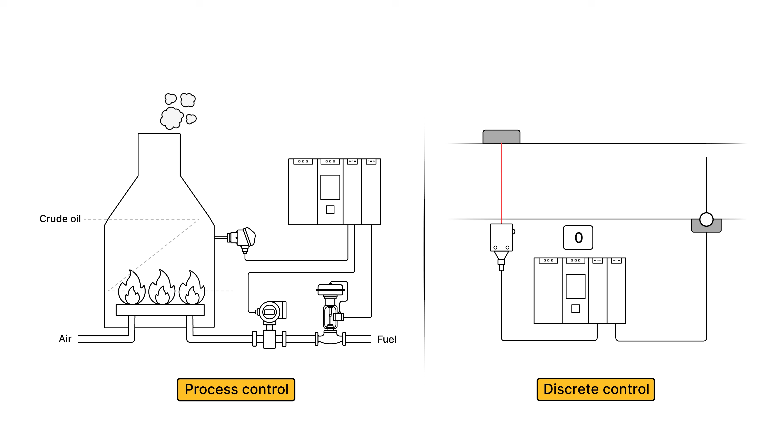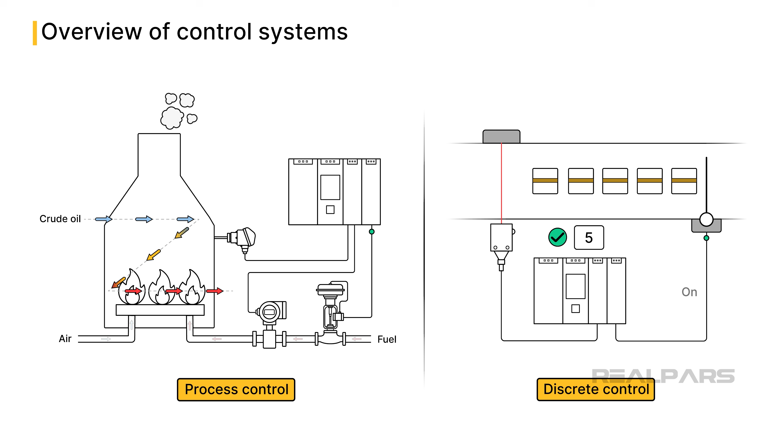In the world of industrial automation, control systems play a crucial role in ensuring processes run smoothly and efficiently. There are two primary types of control systems: discrete control and process control. Discrete control systems are used to manage specific, distinct events. Think of them as controlling the on and off states of machinery.

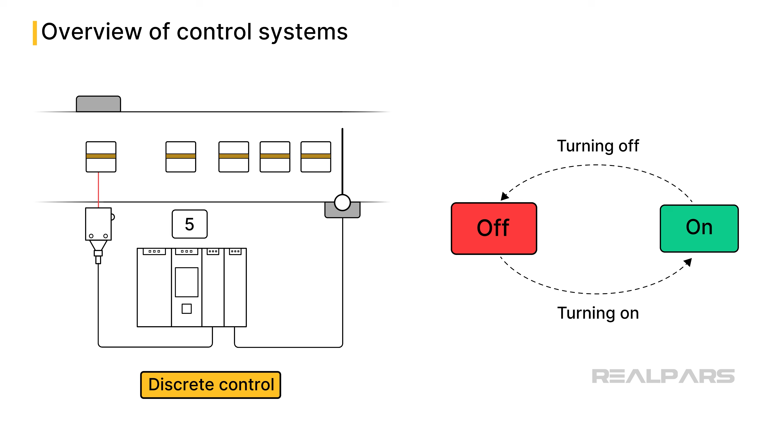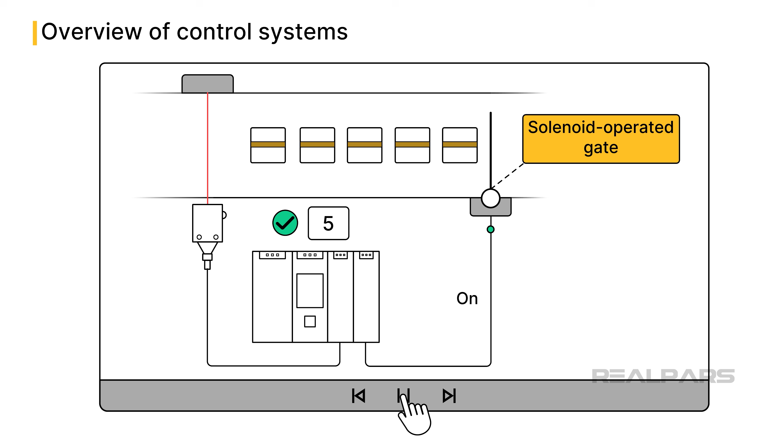For instance, in manufacturing, a conveyor belt lines up boxes before a solenoid-operated gate, ensuring they are queued properly for the next stage. Or in automotive assembly lines, robots weld car parts in precise sequences, ensuring high efficiency and accuracy. In discrete control systems, sensors include detectors such as photo eyes and proximity sensors, mechanical actuators such as drives, and mechanical systems such as conveyor belts and robots.

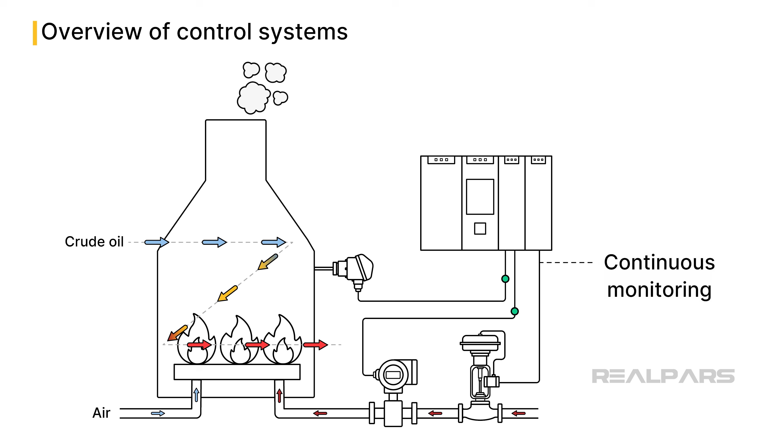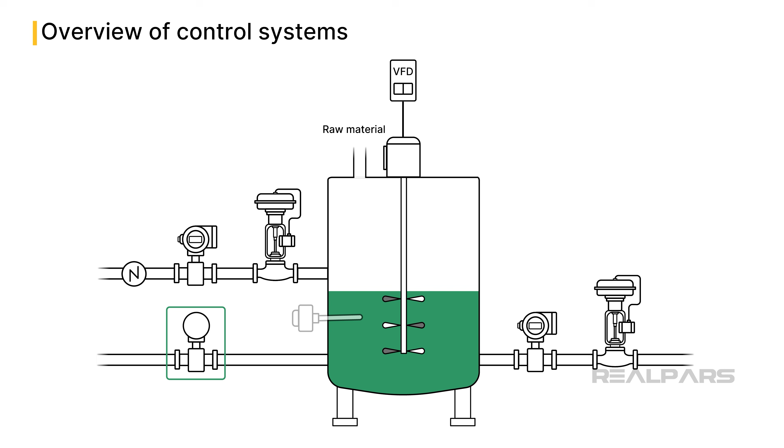Process control, on the other hand, involves continuous monitoring and regulation of processes to maintain a desired output. This is vital in industries like oil refining, where maintaining specific flow and temperature ensures product quality. Or in food and beverage manufacturing, where consistent mixing and heating processes are crucial. In process control, sensors that continuously measure pressure, temperature, flow, and level are used. Actuators include control valves and variable frequency drives.

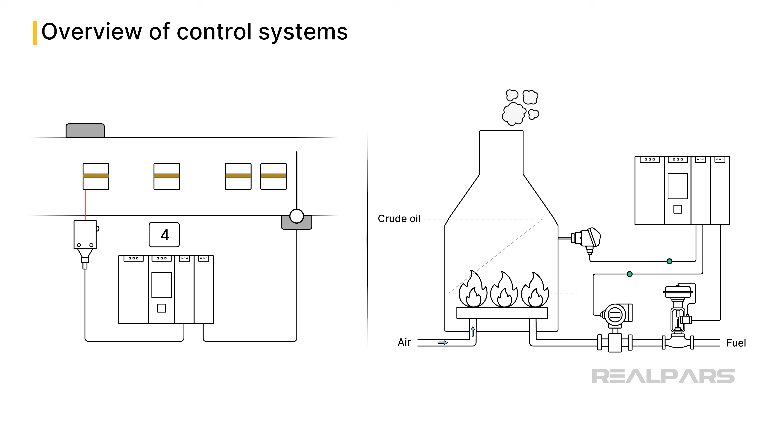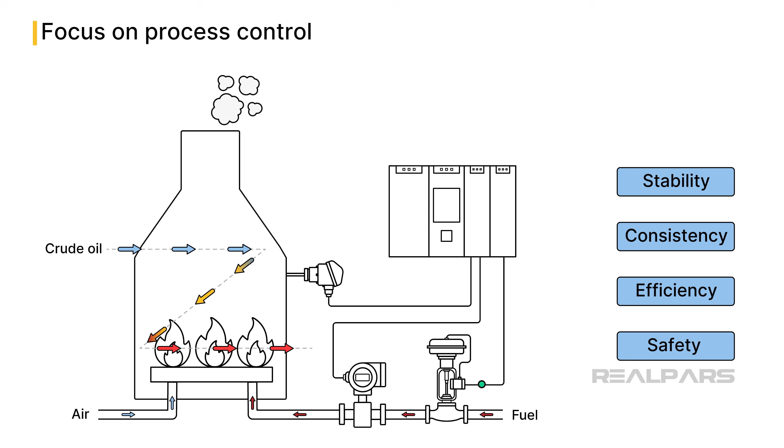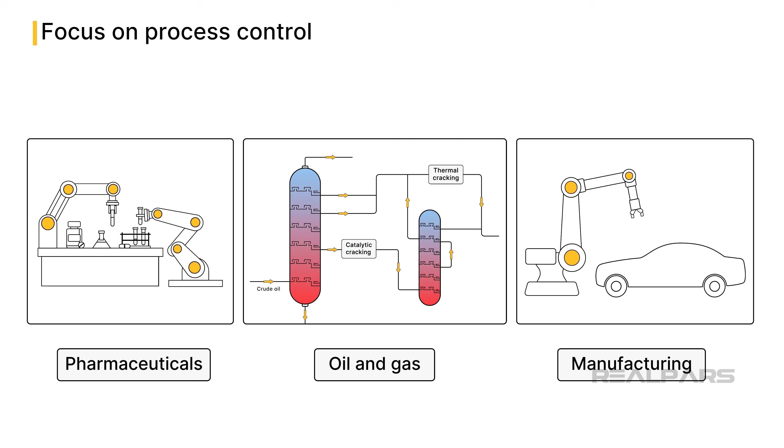Both types of control systems are foundational in industrial automation, ensuring products are made correctly, safely, and efficiently. Control systems are able to monitor and control 24 hours per day, providing reliability and consistency in the process. Process control is all about maintaining stability, consistency, efficiency, and safety in industrial operations. These are essential qualities in industries such as manufacturing, oil and gas, and pharmaceuticals, where precise control over conditions directly impacts the quality and safety of the final product.

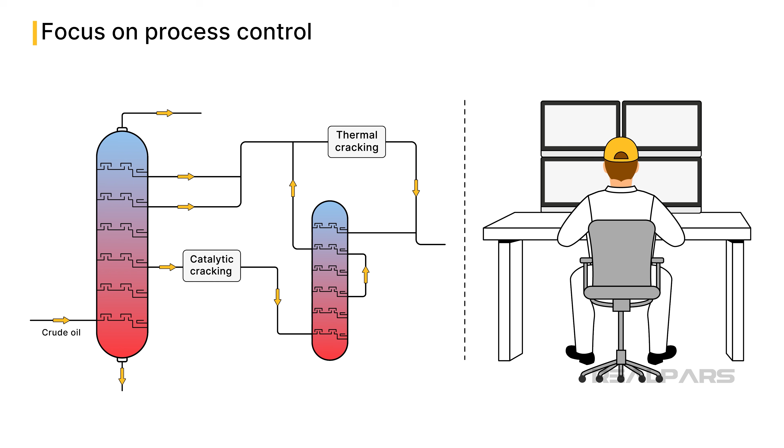Whereas an operator can only view 4 or 5 parameters at a time, process control systems can monitor hundreds, even thousands of sensors and actuators at the same time, providing input data to determine the required changes to outputs to maintain a consistent operation. There are 4 main goals of process control. First, the control system must maintain stability by maintaining consistent process conditions. Second, the control system must maintain consistency in order to ensure uniform product quality. Third, the control system must be effective and efficient, minimizing waste and optimizing resource use. And finally, the control system must ensure safe operation, protecting workers and the environment from hazardous conditions.

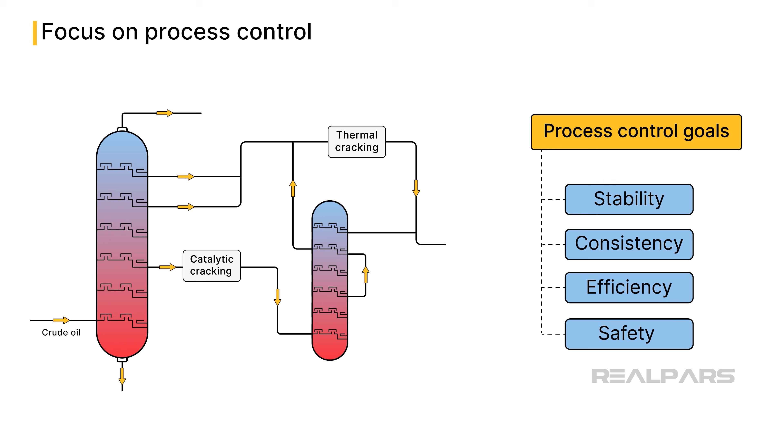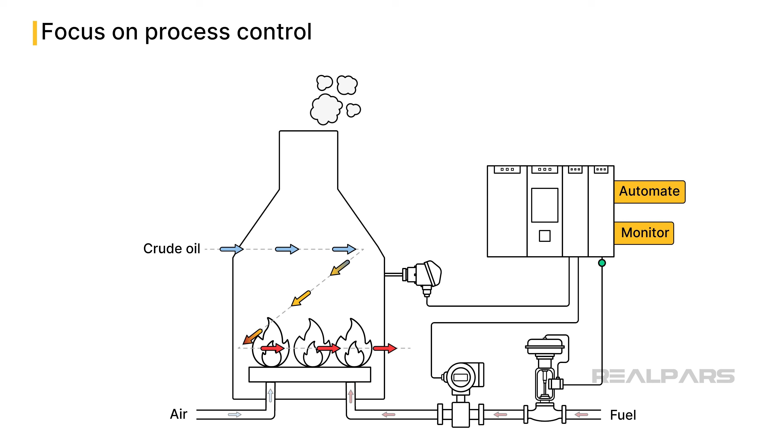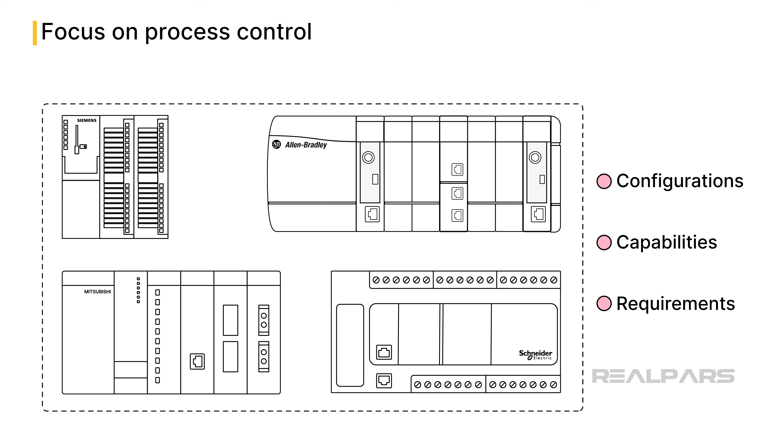Programmable logic controllers, or PLCs, are the backbone of process control. They are specialized computers used to automate and monitor industrial processes, providing the precision and reliability needed to achieve the goals of process control. PLCs come in many different configurations, with varying capabilities and requirements. There are over 25 major manufacturers of PLCs worldwide, each with its own set of features, and each with its own strengths and weaknesses. So how do I choose the best PLC for process control?

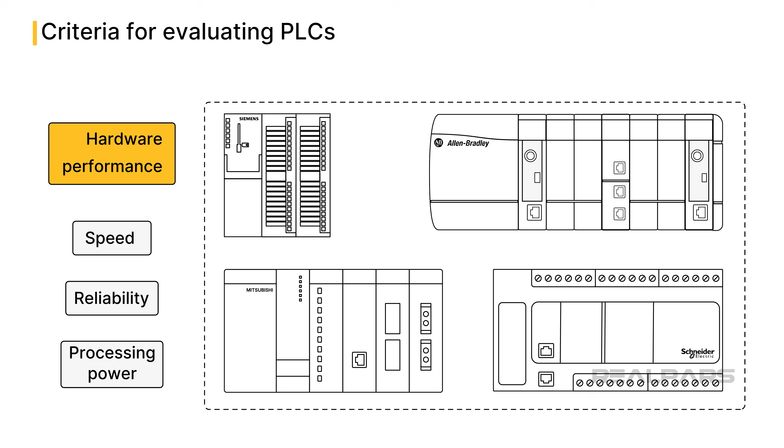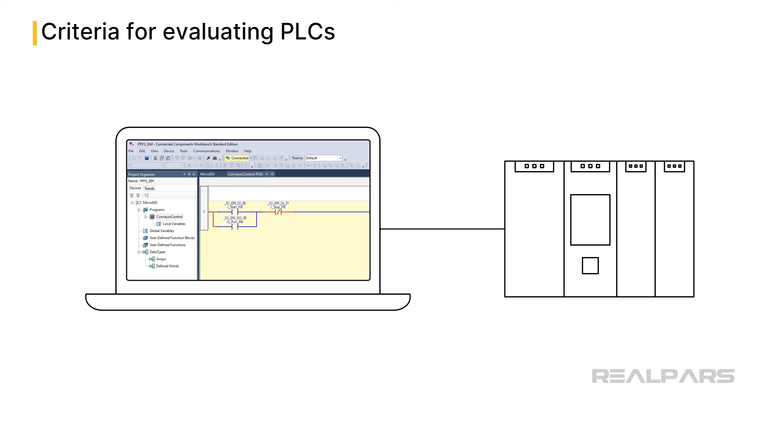First, when choosing a PLC for process control, I need to consider the following criteria: performance, ease of programming, scalability, integration, and cost. I need to understand the performance of the PLC hardware. I look for PLC models with the speed, reliability, and processing power to efficiently handle the complex tasks I need it to perform. Every PLC needs to be programmed to execute the process logic I need. The software should be user-friendly, with intuitive interfaces that simplify programming and troubleshooting. Many programming languages are available, so I look for PLCs that have standard programming languages available, such as ladder diagrams and function block.

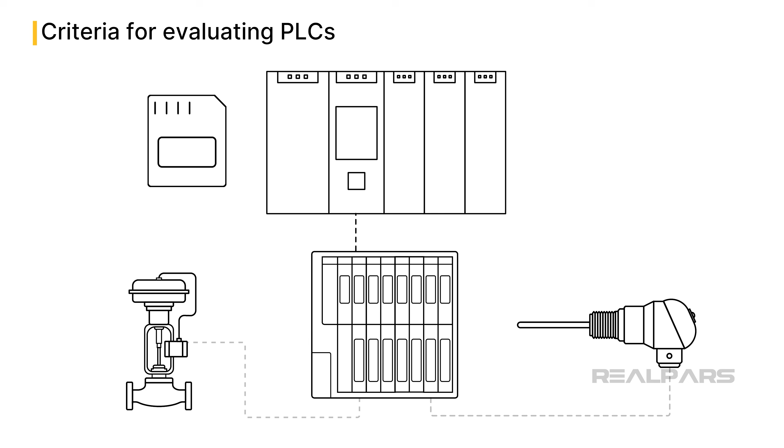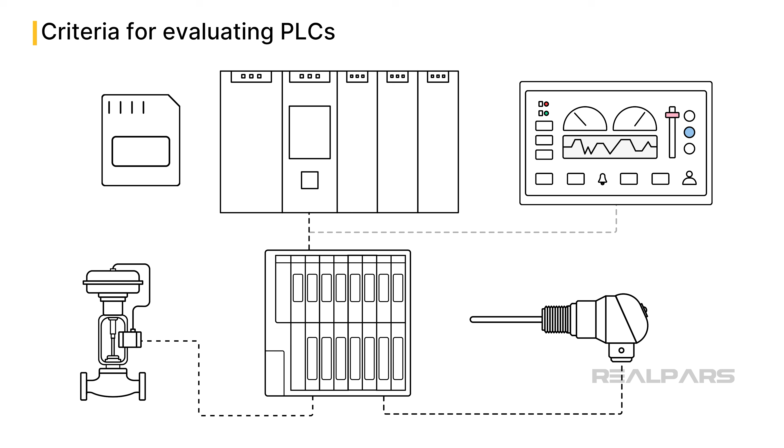The PLC chosen should be able to scale or be expanded, from a small system to a larger system as your needs grow. I look for memory capabilities, remote I/O capabilities, and types of input and output cards supported. The PLC I choose should integrate seamlessly with other systems in the plant, such as HMI stations and devices to ensure smooth operations. The PLC should support standard industrial Ethernet communication protocols.

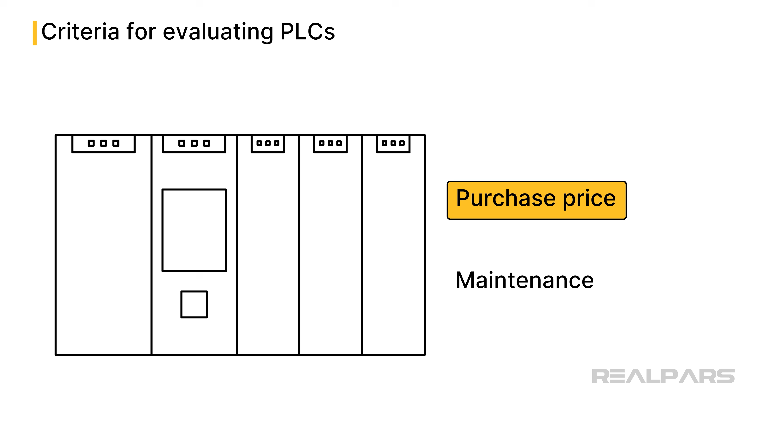Finally, cost is always a concern. I must not consider only the initial purchase price, but also ongoing maintenance and overall cost of ownership. Higher-cost systems generally have higher reliability, richer programming features, and more options for I/O. But many times, those additional features are not required for my specific application, so a lower-cost system may be better.

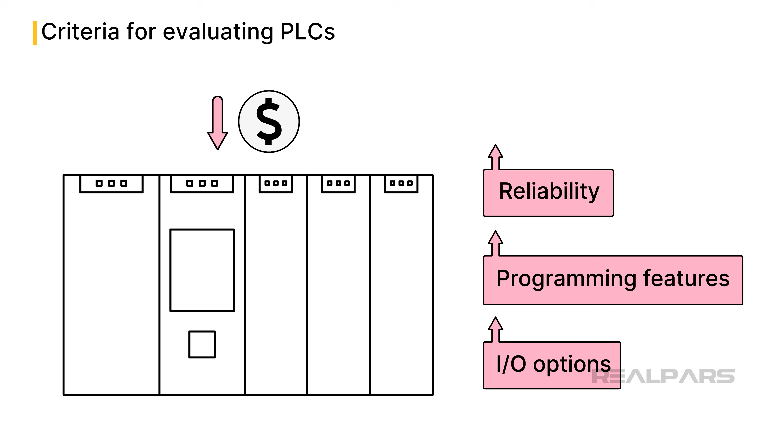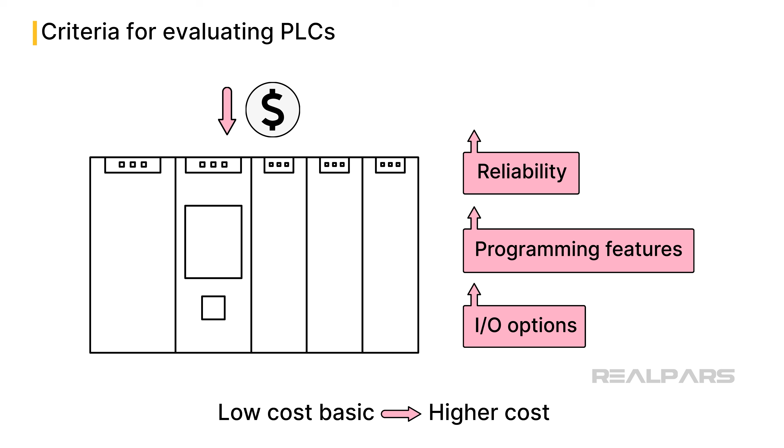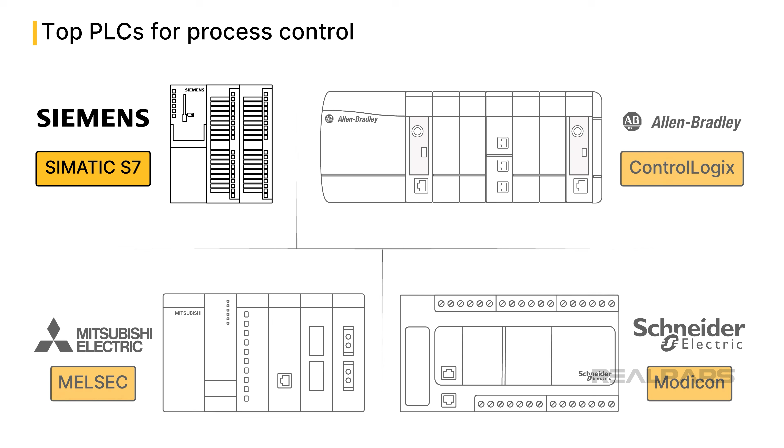Many manufacturers provide a range of processors, from low-cost basic PLC models to higher-cost, feature-rich PLC models. I will highlight 4 of the top PLCs for process control. These are some of the most popular PLC manufacturers and models in the industry, and were chosen to highlight the similarities between these models.

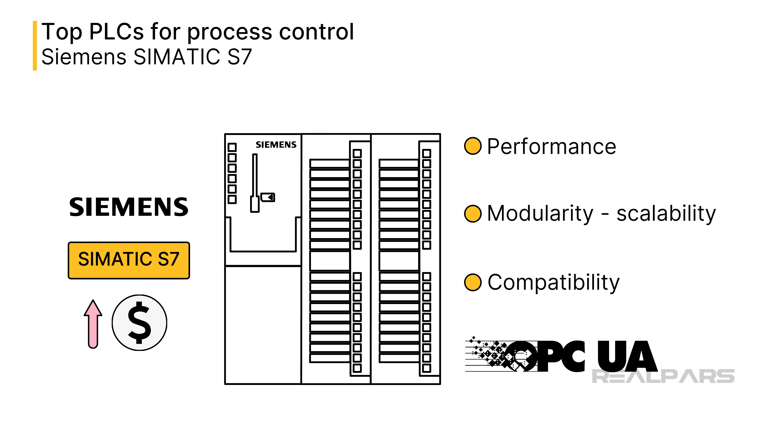The Siemens SIMATIC S7 has been a leading choice in the industry for 30 years, known for its robustness and reliability. Some of its strengths include excellent performance, a high level of modularity and scalability, and broad compatibility with various systems using standard industrial Ethernet communication protocols, including OPC UA. On the downside, an S7 system can be costly and moderately complex to set up and program.

Allen Bradley's ControlLogix is renowned for its user-friendly programming and robust performance. The ControlLogix is the latest evolution of the first Allen Bradley PLCs, which came to market 50 years ago. ControlLogix is easy to program, reliable in demanding environments, and provides a wide array of I/O interfaces. ControlLogix, however, generally has a higher processor cost than other systems, and messaging between processors can be challenging.

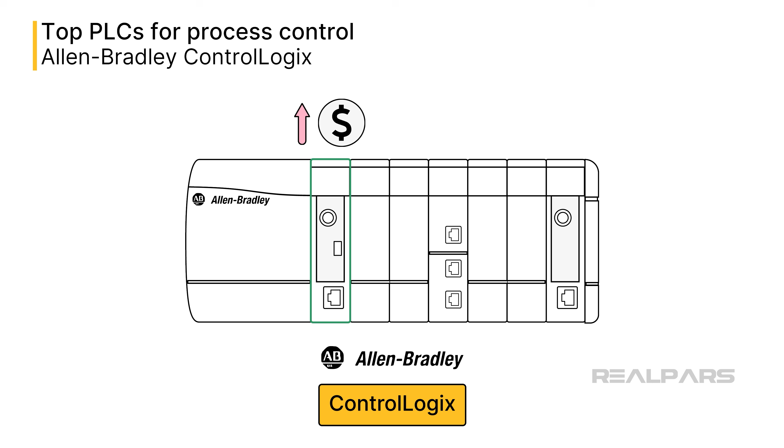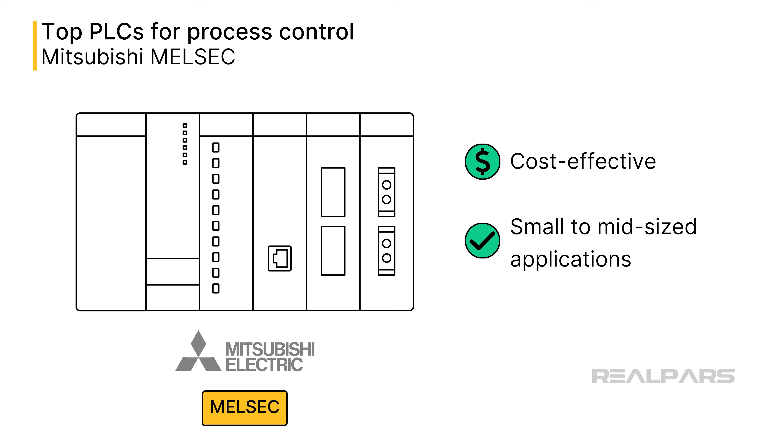Mitsubishi's MELSEC series is a cost-effective PLC option, ideal for small to mid-sized applications. It is affordable and reliable. Its main limitation is its limited scalability as compared to other high-end competitors. Also, non-Mitsubishi communication protocols can be difficult to integrate.

Modicon by Schneider Electric is known for its versatility and strong integration capabilities. The first Modicon PLCs came on the market over 50 years ago. Modicon is versatile and scalable and is easily integrated with other systems. Its biggest weakness is its moderate performance capabilities as compared to other top-tier PLCs.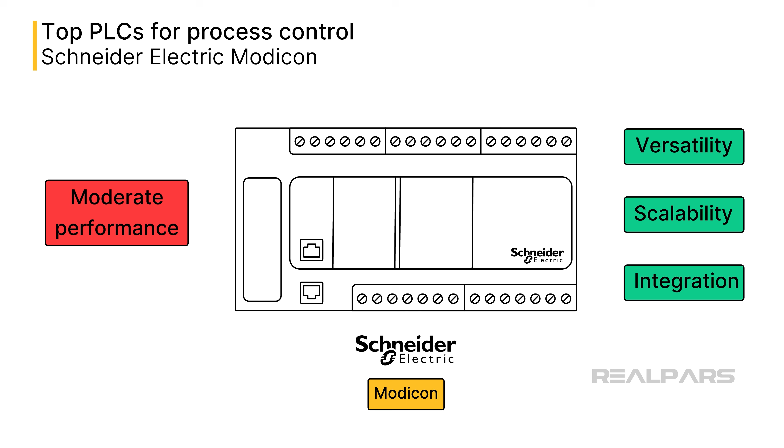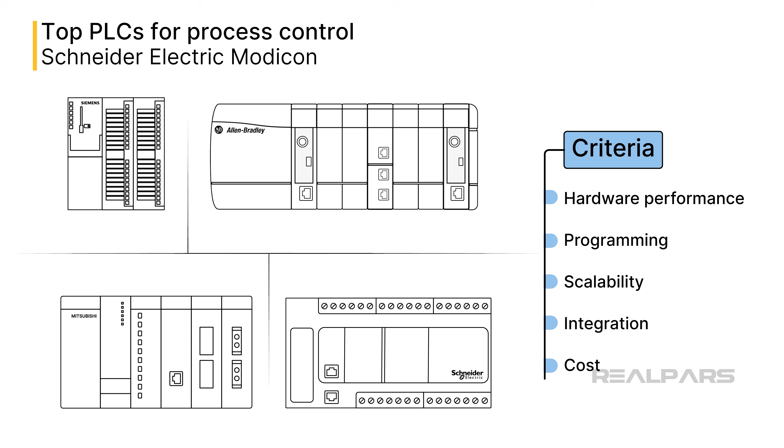As you can see, no PLC is perfect against all the evaluation criteria I discussed earlier, and it really comes down to which system can provide the features and functionality you need at a price you can afford. Now I will briefly discuss 3 real-world case studies using PLCs from some of the manufacturers I introduced you to.

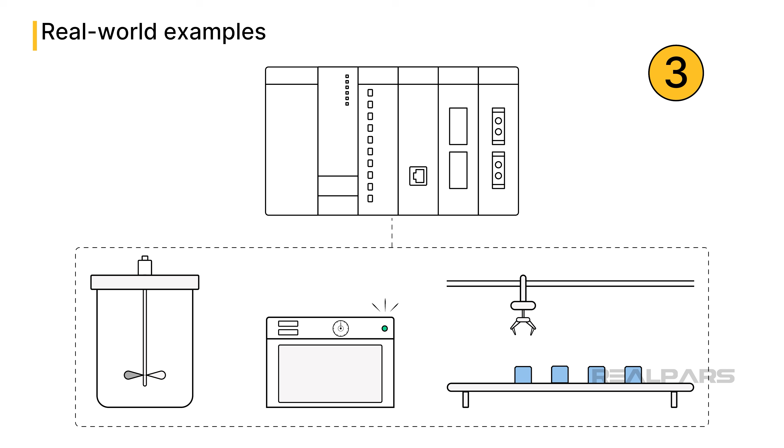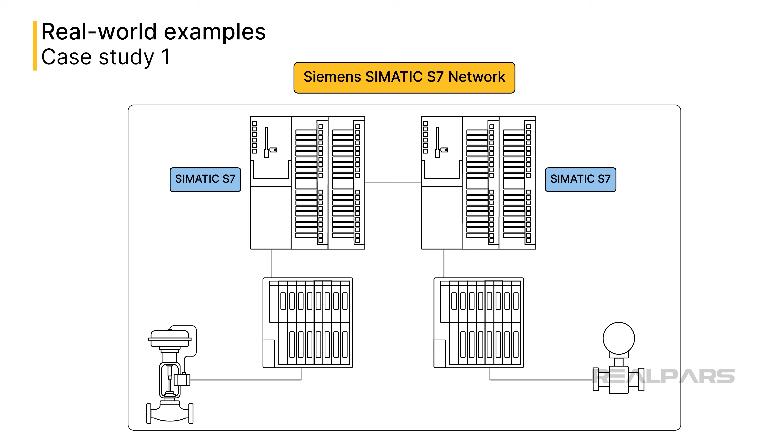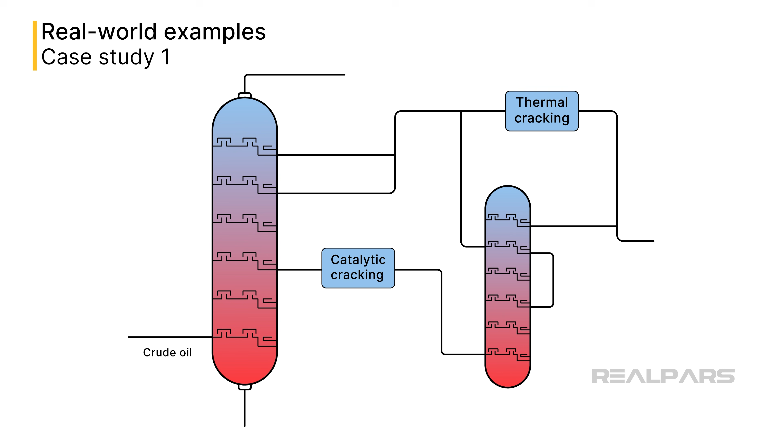A large oil refinery uses multiple Siemens SIMATIC S7 processors and dozens of remote I/O panels to maintain precise control over its refining processes, ensuring product quality and safety for the 10,000 I/O points in the plant. The SIMATIC S7 PLCs are able to monitor and control various stages of the refining process, from distillation to cracking, ensuring that each step operates within the set parameters. This level of control not only enhances product consistency, but also minimizes the risk of accidents by maintaining safe operating conditions.

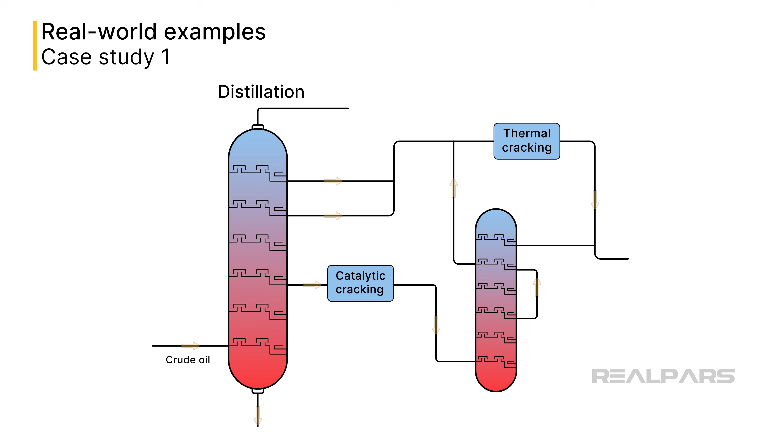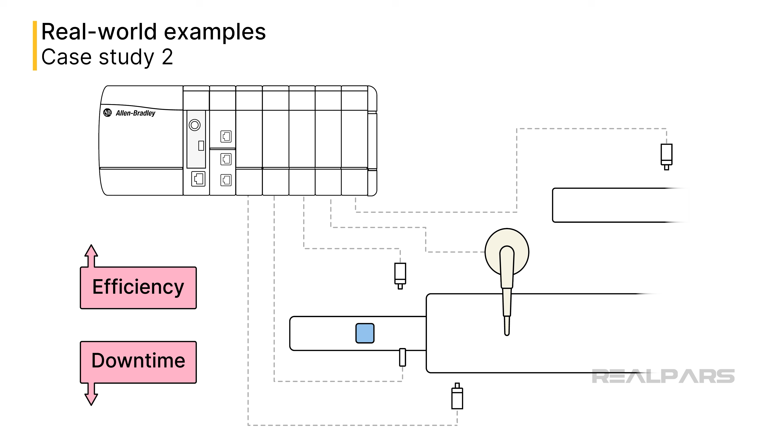A manufacturing plant utilizes an Allen Bradley ControlLogix for seamless automation of assembly lines, resulting in increased efficiency and reduced downtime. The plant has integrated ControlLogix PLCs with robotic arms and conveyor systems using its feature-rich motion control capabilities, enabling synchronized operations that significantly boost production rates. Additionally, the intuitive programming interface of ControlLogix allows for quick adjustments and troubleshooting, minimizing operational disruptions.

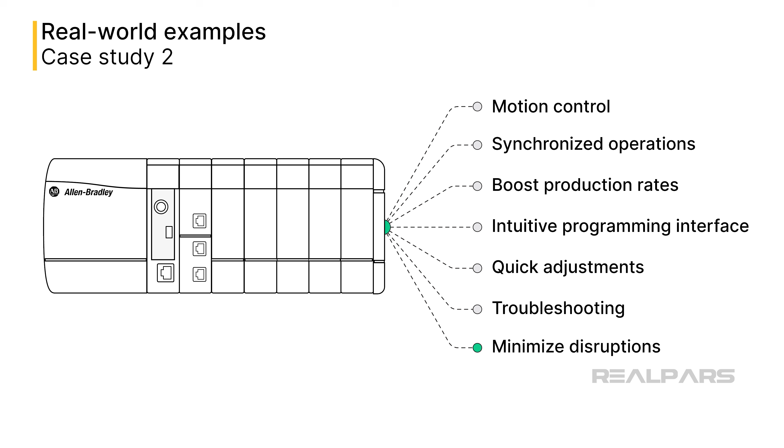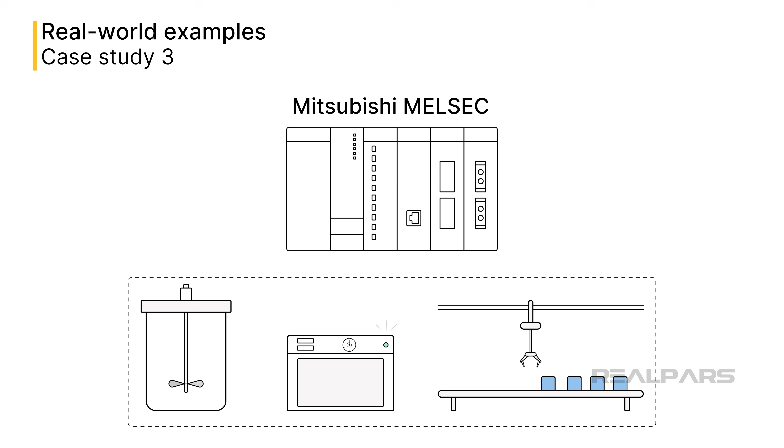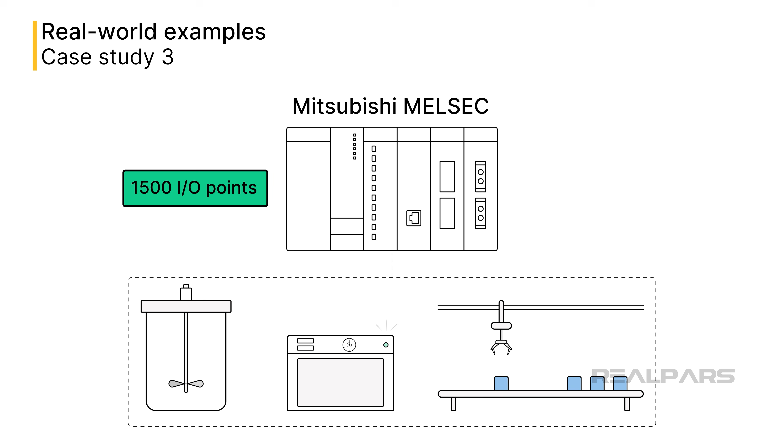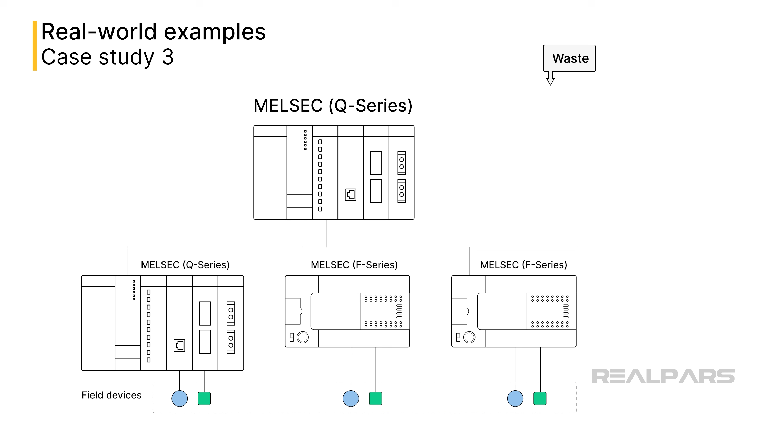A mid-sized food processing facility uses a Mitsubishi MELSEC processor for reliable and cost-effective process control, ensuring consistent product quality. The MELSEC PLCs manage various processes such as mixing, baking, and packaging, with real-time monitoring of its 1,500 I/O points to maintain optimal conditions. The plant uses multiple compact MELSEC F-series controllers for the individual process areas, coordinated by a larger, feature-rich Q-series controller. This system has enabled the facility to reduce waste and energy consumption, leading to lower operational costs while meeting stringent food safety standards.

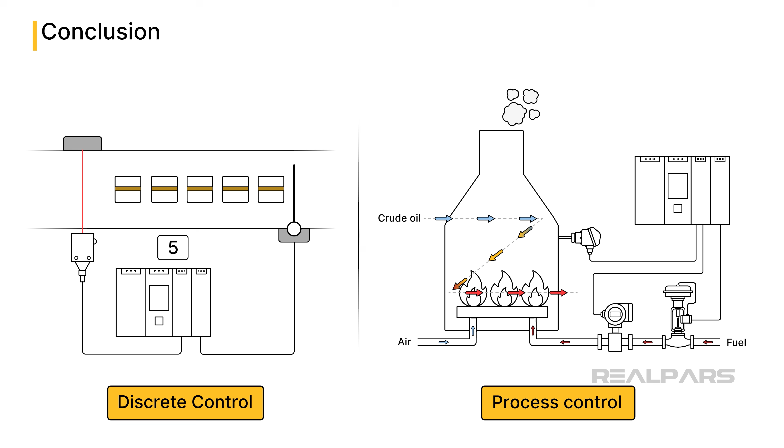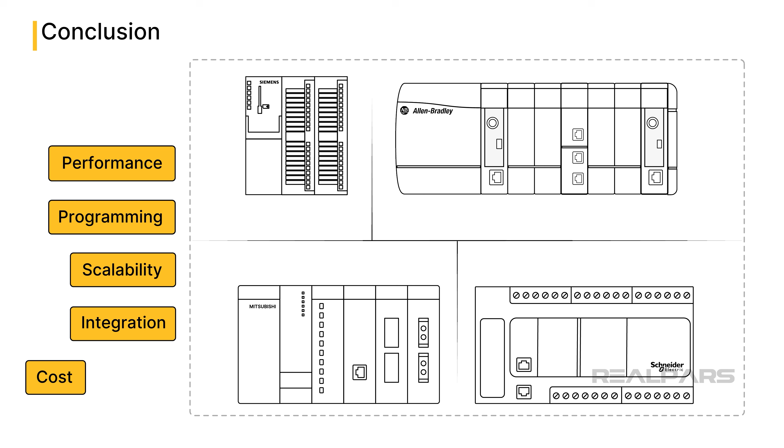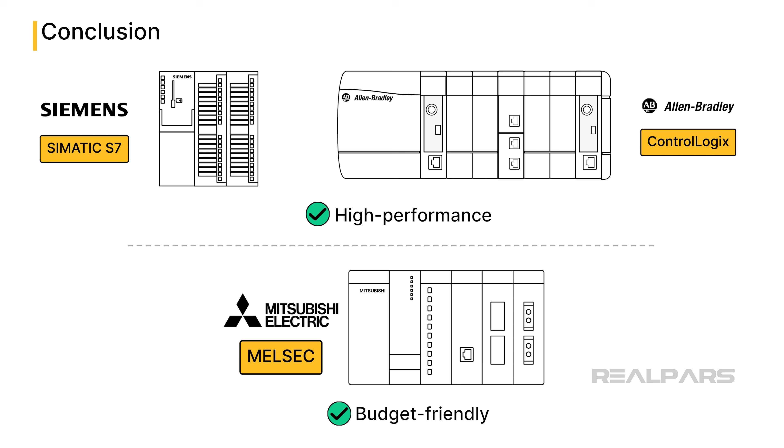In summary, both discrete and process control systems are essential for industrial automation. When choosing a PLC, consider factors like performance, ease of programming, scalability, integration, and cost. Siemens SIMATIC S7, Allen-Bradley ControlLogix, Mitsubishi MELSEC, and Schneider Electric Modicon are all excellent choices, each with their strengths and weaknesses. For budget-friendly solutions, Mitsubishi MELSEC is a solid option. For high-performance needs, Siemens SIMATIC S7 and Allen-Bradley ControlLogix are top contenders. Remember, the best choice depends on your specific requirements.